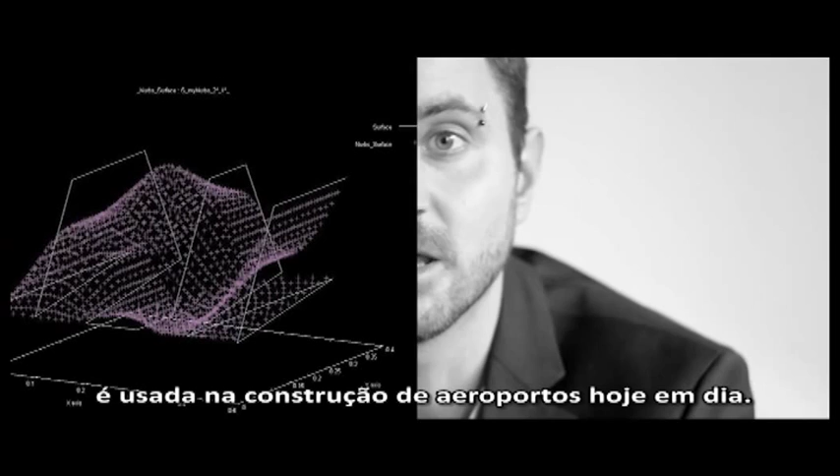However, today we are witnessing extremely complex projects emerging all around the world. The forms that we know from industrial design are growing, and the mathematics developed for the car industry is used for building airports nowadays. So the reason why we try to develop automated methods is the need to deal with the complexity. The reason why complexity is evolving in such a rapid way is because we are developing good methods of automation. So this symbiosis proved to be a stable idea, and it's spreading from one architectural office to the next.

We had complex architectural projects in history, but in order to build them, we needed an enormous amount of time and working power. Times have changed. We build computers to simulate and calculate zillion times faster than we can, more efficiently and more precisely. So we just have to instruct them properly and watch them create.

So this is what we're trying to do. We are working on those instructions basically. Well, as everything in nature, we humans try to do as much as we can with the least amount of time and energy.

So in the construction business, we often rely on prefabrication. By using simple elements copied millions of times, we achieve complexity. We realize that if we make a standard element and a standard connection, we can achieve really stunning and complex structures. But there is a whole level of structural complexity that, for example, nature has, that we just couldn't afford.

If the shape of our project is a free form, like in industrial design, like in nature - a form that has no geometrical regularity, a form that when subdivided in any way consists of unique elements - then we have to forget about old methods of design and production.

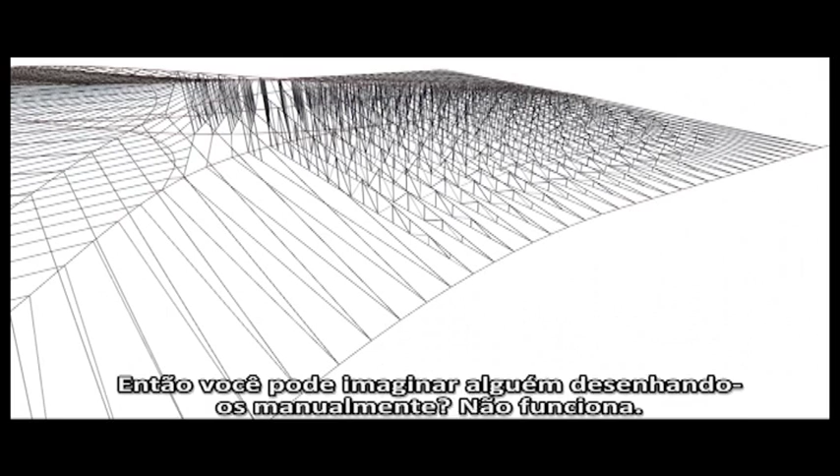Some of the projects that I worked on had several hundreds of thousands of unique steel rods, for example. Can you imagine someone drawing them by hand? It just doesn't work. So I had to automate the process of drawing. I had to program it. That is how it starts.

Unique elements, thousands of them, cannot just be copied. You have to design a rule behind their generation and give the computer instructions on how to draw them. And you don't stop at the simple lines.

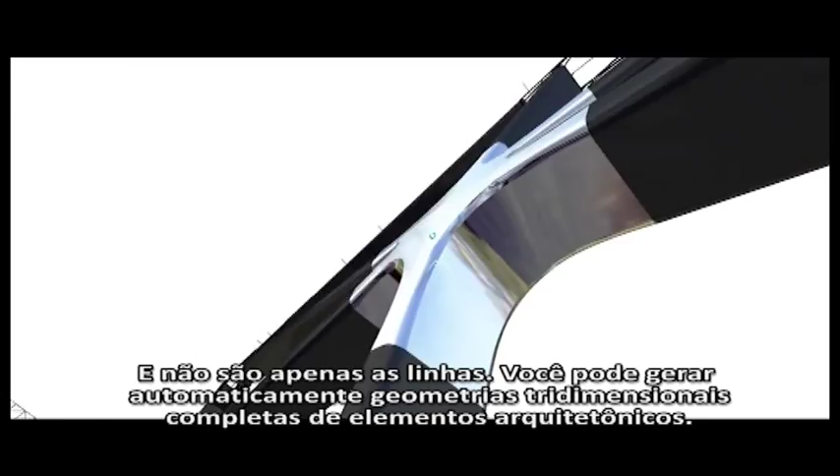You can automatically generate complete 3D geometries of architectural elements. You can automatically make blueprints for each unique element. Imagine drawing something like this for 10,000 unique connections - how about 100,000? Instead, you think, make the rules, write the code, and hit enter.

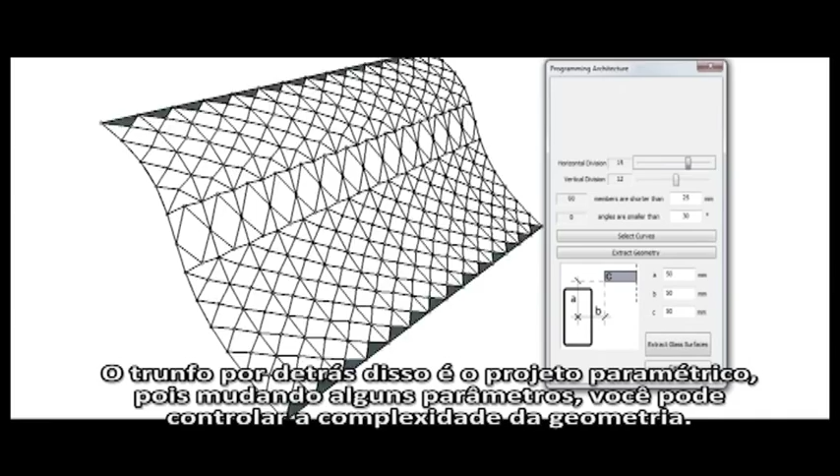The term behind this is parametric design, because by changing a couple of parameters you can control a complicated geometry. But we don't stop there.

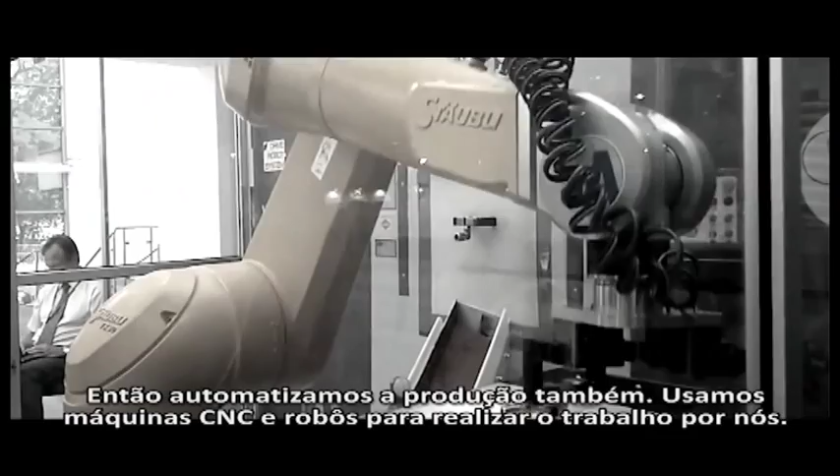There is no use in drawing everything automatically if you need to produce every single element by hand. So we automate the production as well. We use CNC machines and robots to do the work for us.

But instead of doing one single action millions of times, like in the car industry, we program them to do different actions. After the CNC machine receives the instructions, it doesn't really care if all the elements are the same or if they're all different. It just works line by line, and those lines are generated automatically.

But we don't stop there. With automation of this kind, we know what we want to do, but we don't have the time and energy to do it, so we instruct the computer to generate the geometry and cut and mill instead of us.

How about stuff that we don't know? We can use different kinds of simulations to find out what the best possible structure looks like when our intuition or knowledge is not sufficient.

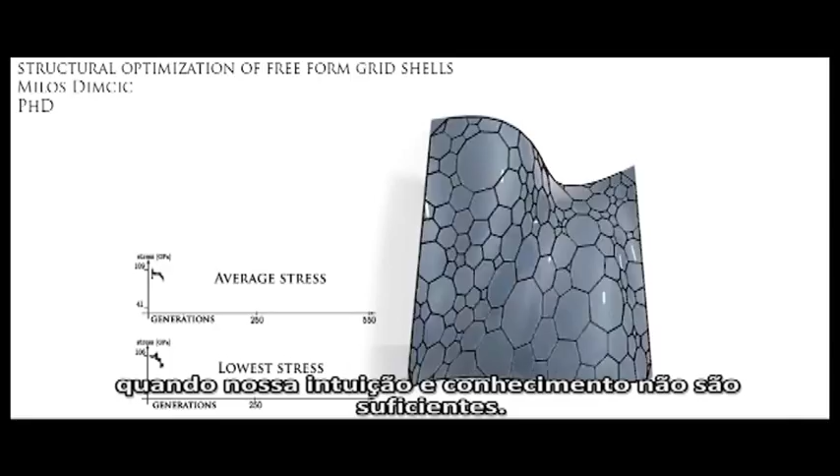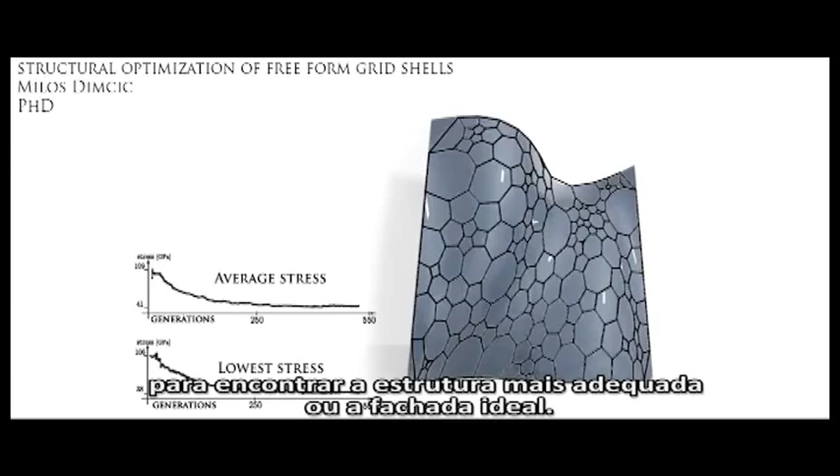Using different kinds of optimization techniques, like genetic algorithms for example, we can let the computer generate thousands and millions of solutions in a simulated process of evolution in order to find the fittest structure or the optimal facade element.

How about energy saving? You can easily incorporate sun positions and shadow calculations into the process and optimize your design to fit different criteria at the same time.

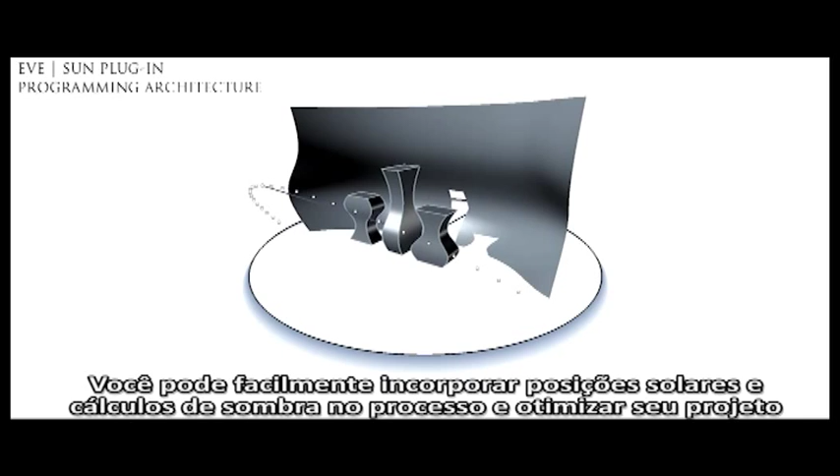So our specialty is the combination of static analysis and CAD programs, so we can generate and statically calculate thousands of different structures within a single hour, thus doing something you would probably need several years to do by hand.

But we don't stop there. We're developing a special type of artificial intelligence that will let structures evolve to fit a number of criteria.

Basically, the reason why it is so difficult to define what we do is that it is a very broad and creative field. People today even have trouble imagining the degree to which processes in architecture can be automated. That is why one of our main tasks is to show people not only what we do, but what we can do. Every project comes with a different set of problems, and that is the most challenging part in this discipline.

You always have to come up with new solutions. The other challenging thing is that you have to have knowledge and good foundation in three fields: architecture, structural design, and programming, in order to create efficient and useful methods.

Being an expert in one or even two out of these fields will not get you far when it comes to practical problem solving in the building industry. So the important thing to remember is that the possibilities are there and they're not fully used.

The first step is to think about programming and integrate it from the very beginning, from stage one in the design process. Nowadays, programming comes at the end only to solve problems that emerged during the design. But if we use an automated process from the very first until the very last phase, we can achieve much more than we do today. We can be more efficient and we can build much more creative structures than ever before in human history. And we don't stop there.